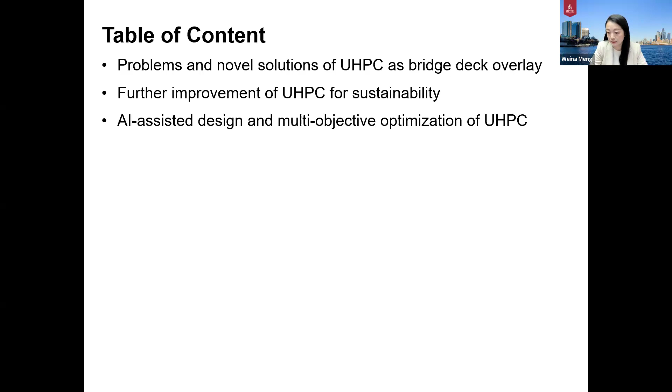So currently in the US, there's a high demand of bridge maintenance due to the spalling, delamination, and rebar corrosion of the bridges. Many of the bridge decks need to be repaired. So the most popular repairing materials for the bridge deck overlay include latex modified concrete (LMC), low slump dense concrete (LSDC), high performance concrete (HPC), and UHPC, ultra high performance concrete.

Compared with other types of repairing materials, UHPC enables much thinner thicknesses for the overlay construction, and also exhibits much higher mechanical properties. More importantly, UHPC has much better durability, which could allow extended service life, as you can see here. So UHPC is considered a very promising repairing material for bridge deck overlays.

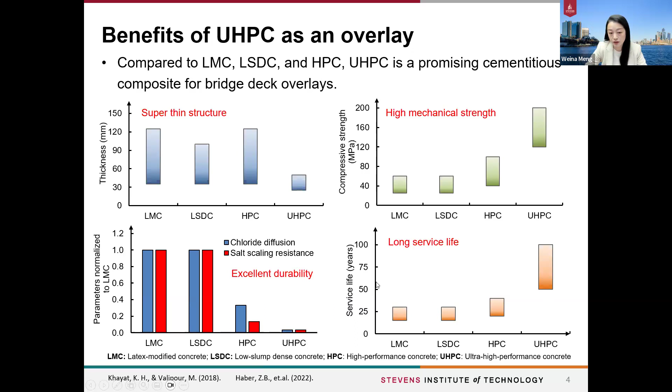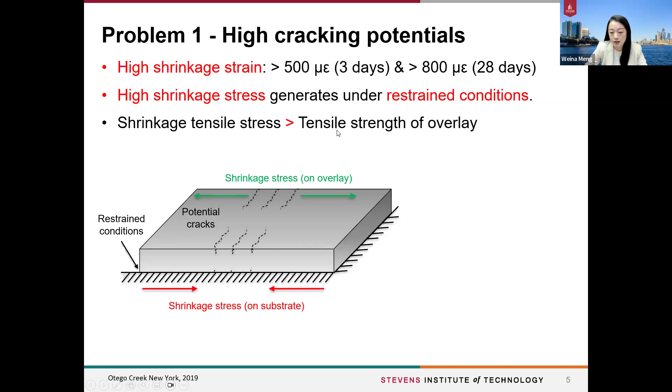However, there are several critical challenges of UHPC to be used as an overlay. First is it has high cracking potential, mainly because we use high binder content in UHPC, and that results in high shrinkage at early age. So the high shrinkage will introduce high tensile stress when it exceeds the tensile strength of the concrete, especially at early ages. It will crack the bridge deck overlay.

So the second big issue is the difficulties in slope casting. For the majority of bridge decks, it is a sloped structure with a slope somewhere between 2% to 5%. But the typical UHPC, as you can see, is very flowable, so it could flow from the top to the bottom, and it is hard to stay on the deck. So intensive labor and formwork usually will be needed for this kind of construction.

So the third problem we have here is the difficulties in large-scale production of UHPC. As you can see, usually during mixing, the mixer will be shut down if you mix a large volume of UHPC. But it's really not the case for using a normal mixer to mix conventional concrete.

The reason is, as you can see in this figure, it shows the mixing torque evolution for conventional concrete. The peak mixing torque is very low, much lower than the capacity of the mixer. So for mixing conventional concrete, there's really not a problem.

But for UHPC, if you mix the same volume as conventional concrete, the peak mixing torque will easily surpass the capacity of the mixer, causing the mixer to stop, which may damage the engine and waste all the raw materials. So those are the three critical challenges we identified.

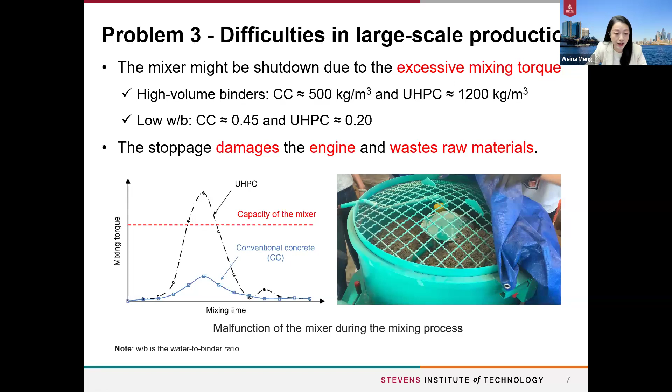To address the first issue, the high cracking potential, the most effective way is to reduce the shrinkage of UHPC by properly using internal curing agents, shrinkage reducing admixtures, or expansive agents. This shows a comparable shrinkage mitigation rate as summarized in this table.

However, using internal curing agents usually requires at least 24 to 48 hours to pre-saturate these materials, which is not very practical. For shrinkage reducing admixtures, even though they are very effective in reducing shrinkage, they are reported to have adverse effects on mechanical properties.

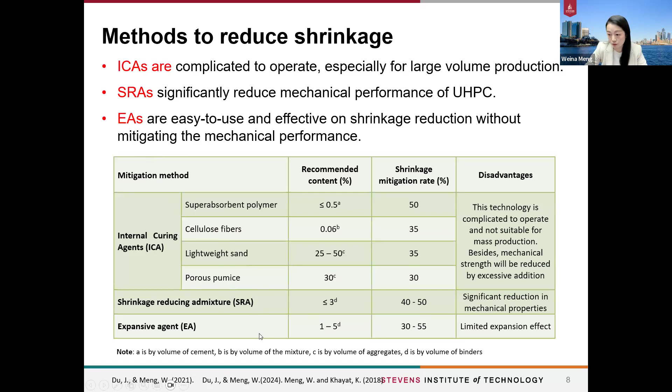Compared with the other two methods, using expansive agents is an easy method that can reduce shrinkage a lot without mitigating mechanical performance. So in our study, we tried to further improve the efficiency of the expansive agents to improve the expansion effect for reducing more shrinkage.

So we simply add the dry expansive agents into water for a couple of minutes, allowing sufficient water and space for it to grow more expansive products, enhancing the expansion effect.

So we use the ring test for evaluation, and we installed distributed fiber optic sensors on the ring specimens. This allows us to measure shrinkage stress development, and at the same time we also measure the tensile strength development of the concrete materials.

Using those two results to calculate the cracking potential over time. Usually if we can have the tensile strength development always surpass the shrinkage stress, then we will have concrete with very good cracking resistance.

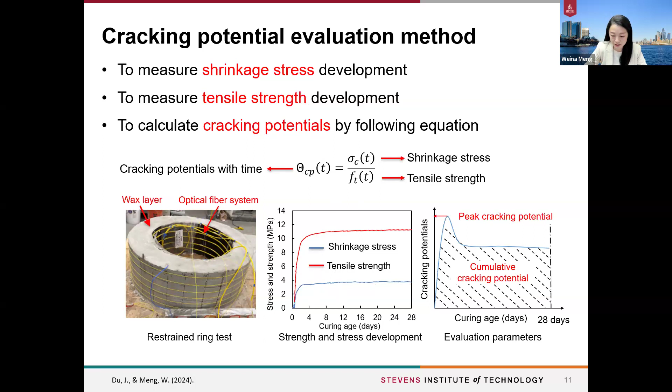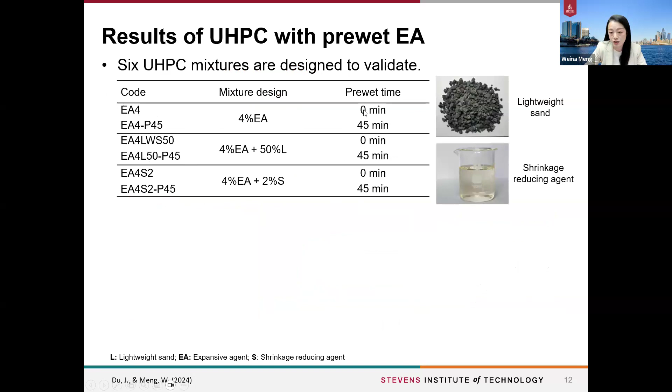So here we compare three groups of UHPC mixtures with different shrinkage reducing strategies. But for each of the strategies, we all use the expansive agent, and we compare the case with and without the pre-wetting method.

The result shows that with pre-wetting, we can significantly reduce the peak cracking potential as well as the cumulative cracking potential. That's for the best mixture with 4% expansive agent, 50% internal curing agents, lightweight sand, and 45 minutes of pre-wetting. With this mixture, until now we haven't seen any cracks.

So for the second problem, related to slope casting, the effective method is to enhance the thixotropic properties of UHPC, because thixotropy can enhance the shape stability of UHPC after casting.

As you can see, with high thixotropy, the UHPC can stay on the sloped panels, which can help us minimize the formwork and other construction-related costs. The typical way to enhance thixotropy is to use nano clay powders.

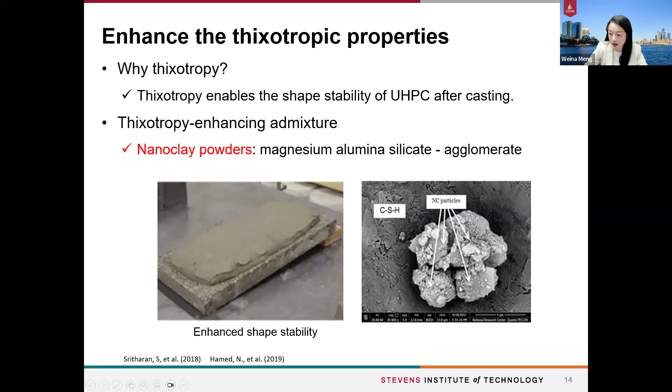However, this method, as reported, has very severe agglomeration of those nanoparticles. These agglomerations have very adverse effects on the mechanical properties as well as the durability of the materials. So to avoid such agglomeration, we use well-dispersed, water-based nanoclay suspensions to enhance the thixotropy.

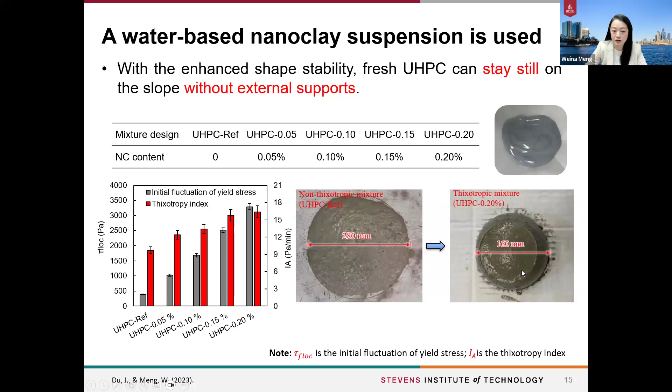As you can see, the thixotropic properties can be very effectively enhanced. With the enhanced shape stability, the fresh UHPC can stay on the slope without external supports. We also evaluate the interfacial properties of the UHPC and the substrate concrete.

We use the direct shear test to evaluate the bond strength at this interface, and we also quantify the interface voids by microstructural analysis.

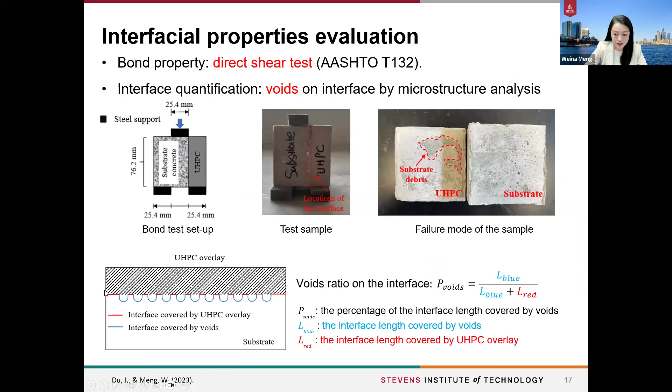The result shows that increasing the thixotropy by increasing the nanoclay content would reduce the bond strength. This is because more air voids were introduced at the interface.

So it is suggested that a little vibration should be applied to the thixotropic UHPC in order to reduce the air voids and improve the bond strength.

But for the vibration, we could optimize this process. We can use the minimum vibration time to achieve acceptable bond strength, as there's a development of bond strength with increasing vibration time, and it stabilized after a while for different mixtures.

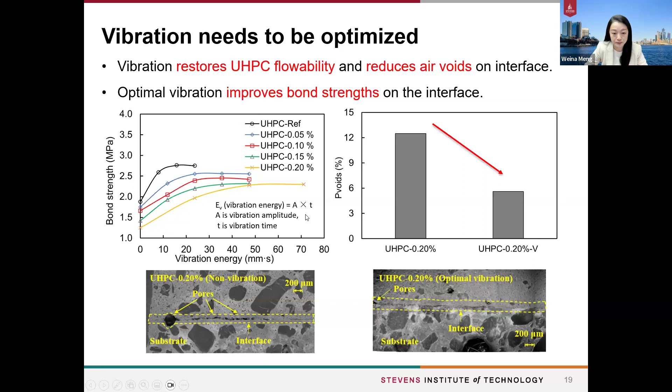For the third problem, to facilitate large-scale production of UHPC, we should first understand the mixing torque evolution during the mixing process. The most difficult time is when materials transform from solid to liquid. After that, torque reduces to very small values, representing the homogeneous time. By understanding the key impact factors on mixing kinetics, we could optimize mixing procedures for UHPC production at large scale.

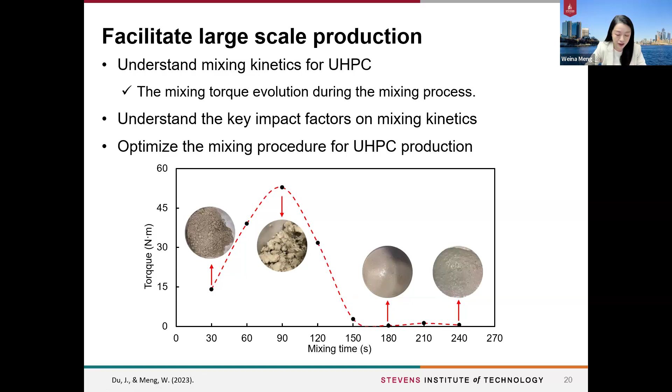In our studies, we investigated three key parameters: mixing temperature, mixing volume, and mixing methods.

Specifically for mixing methods, we have a mono-batching method. This means we add all raw materials at the same time, then add water and chemical admixtures, and homogenize it at once.

For the multi-batching method, we equally divide the raw materials into 2 to 3 portions. We add one portion and homogenize it, then add the other portions until all materials are added and homogenized.

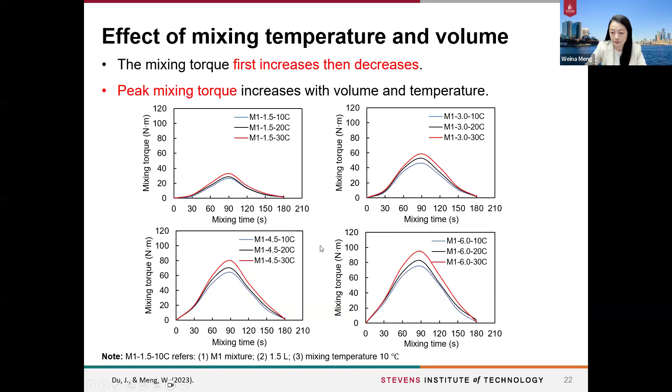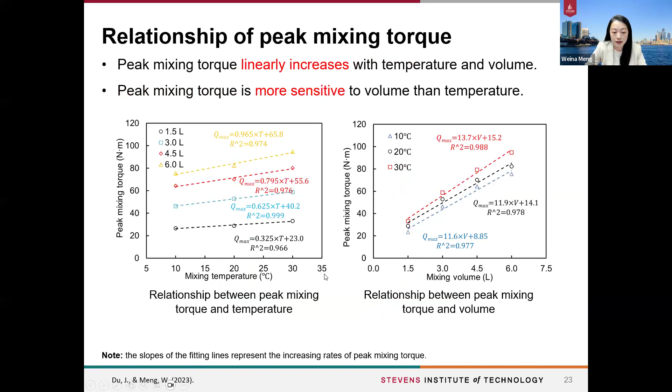From our results, we find that both temperature and volume increases significantly increase the mixing torque. The peak mixing torque is more sensitive to volume than temperature, as shown in this analysis. Multi-batching can effectively reduce the peak mixing torque.

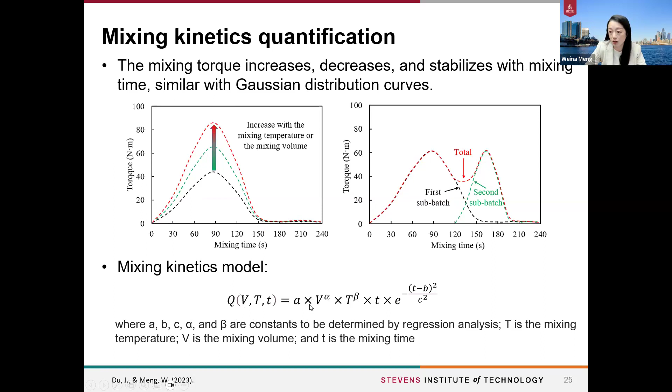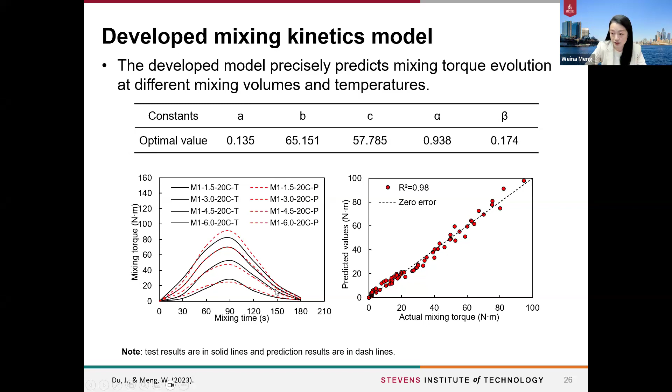By regression, we can determine the constants for the model and use it to predict mixing kinetics curves. We developed this model because we want to use it to optimize the mixing process for any large volume of UHPC.

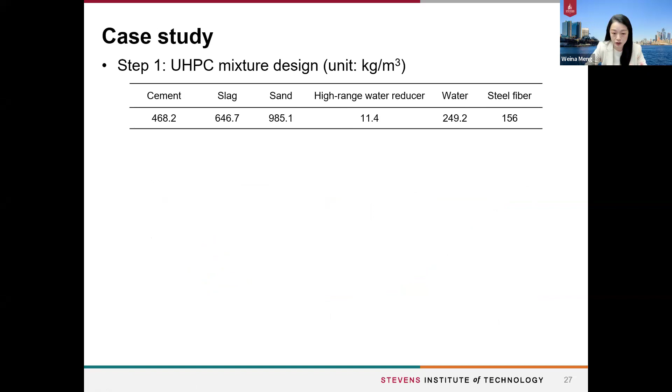Here's a case study. If you have a certain UHPC mixture design, the first thing you should do is determine the model constants by conducting some small batches of UHPC.

Once you determine the constants, given the volume you target for mixing and the mixing temperature for construction, you can determine the mixing torque for mono-batching, 2-batching, or 3-batching.

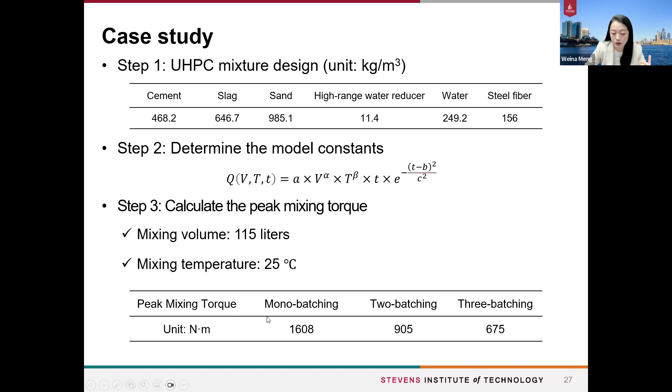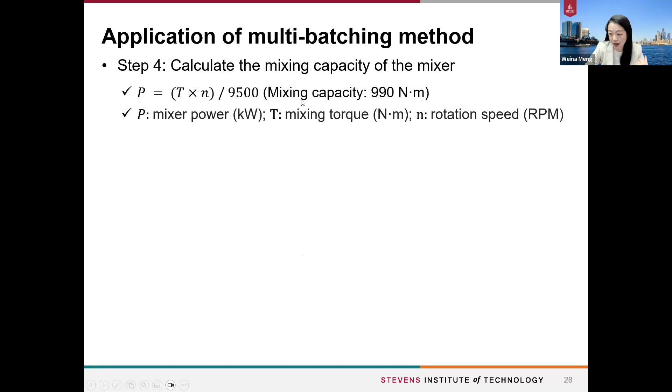After that, given the mixer you have—whether a normal mixer, pan mixer, or high shear mixer—you can calculate the mixing capacity of that mixer. Once you know that, you can compare the different mixing torque evolution curves with the mixing capacity. In our case, a single mono-batch definitely will not work.

What you can do instead is a 2-batch approach, which will be sufficient for successful large volume production if you use a normal mixer. This is the 2-batching method, and as you can see, it mixes very smoothly. So we addressed this problem.

In brief summary, our contribution to UHPC overlay is addressing critical issues. We developed UHPC with low cracking potential, developed methods for enhancing shape stability of UHPC for sloped casting, and developed the fundamentals for optimizing the mixing process for large-scale UHPC production.

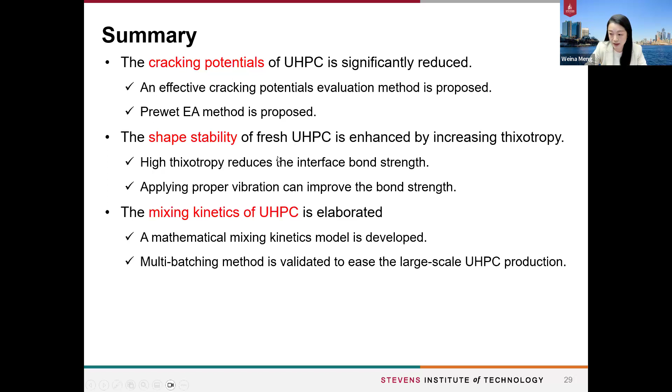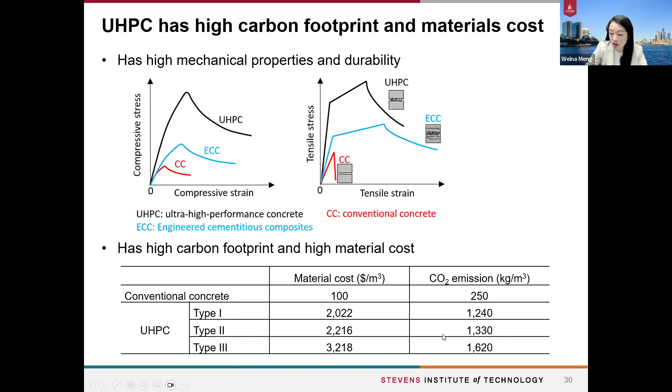Currently, we propose many strategies to decarbonize UHPC, including integrating low carbon ingredients, advancing processing methods, and developing new construction techniques.

In the interest of time today, I will focus on the utilization of solid wastes and our work on intelligent design for sustainable UHPC.

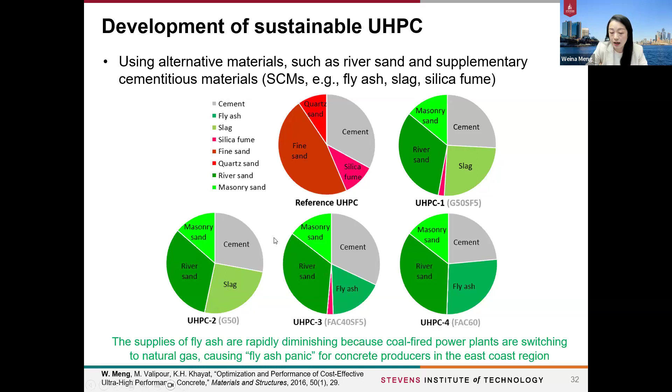The major work on developing sustainable UHPC materials is to replace cement with high volumes of supplementary cementitious materials such as slag and fly ash. However, those typical supplementary cementitious materials are in high demand, and it's reported that supplies of some SCMs are diminishing. There's really a need to find alternatives.

In this work, we try to find alternatives, specifically high carbon and porous types of wastes, to replace cement and develop low carbon, cost-effective UHPC. The high carbon waste materials I will introduce today are off-specification fly ash (OSFA) and biochar.

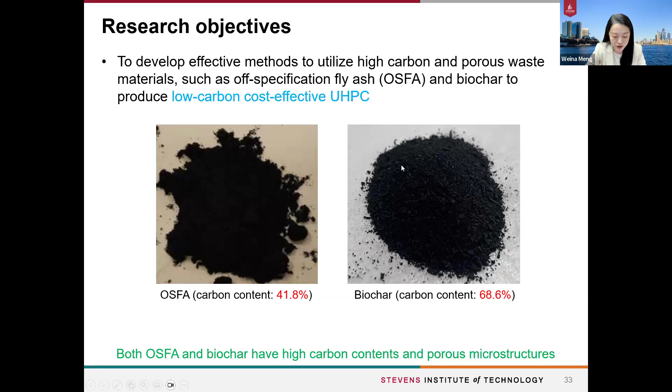So we consider those two materials due to their high potential and large availability. Again, the off-specification fly ash, as you can see, has a very large amount. Just 2 to 3 years ago, it was still a very large amount, and it's really targeted for landfill.

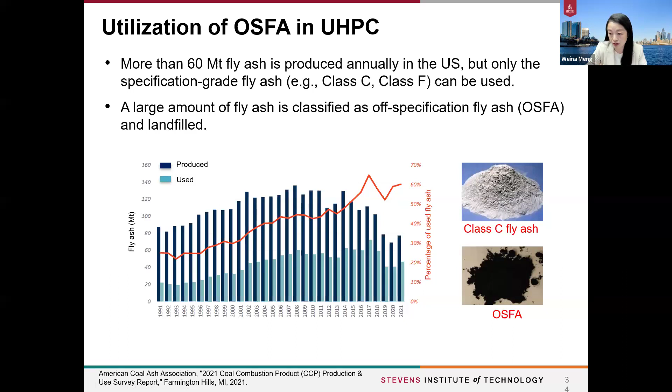Different from normal fly ash, the OSFA has very low reactivity because, compared with normal fly ash, it has negligible reactive oxides in the system. The majority content is carbon, and that reduces the mechanical properties as well as the durability of concrete. Also, the OSFA has very low density, and due to its high surface area, it absorbs some chemical admixtures and ions. Specifically, it's reported that it absorbs the air entraining admixtures, which could reduce the freeze and thaw durability.

So there's a lot of problems with the OSFA. In our studies, we investigated three groups of UHPC with different binder systems. The first is a control with 100% cement. The second is a binary system with OSFA at different content and cement. The third group has a fixed 20% OSFA with different content of slag and cement.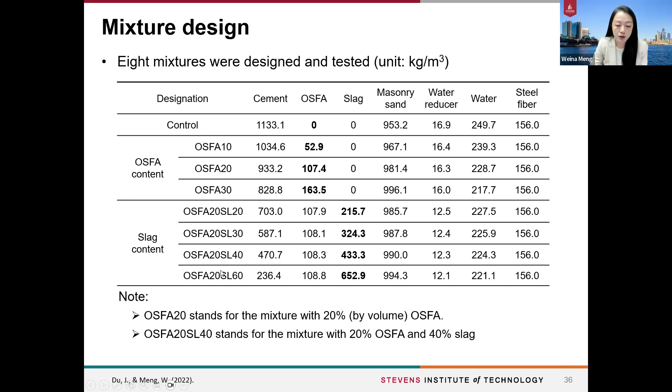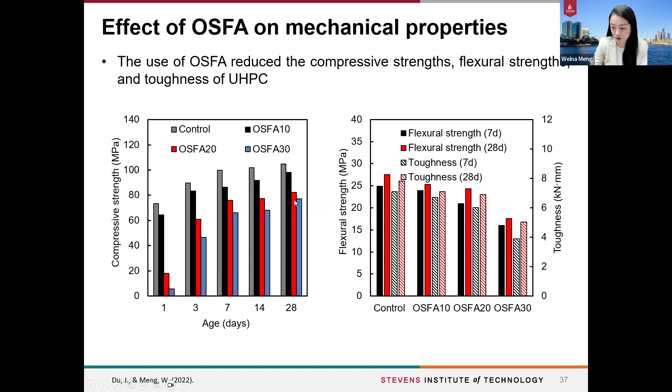As expected, if we use OSFA to replace cement, both the compressive strength and the flexural properties significantly reduced. The reason is that OSFA retards and hinders cement hydration due to two effects. First is the dilution effect: OSFA is inert and much less active than the cement, so there is much less cement hydration. Second is the adsorption effect: as OSFA has very high surface area and high carbon, it absorbs the calcium ions dissolved from the cement, which hinders the precipitation of hydration products.

But the good thing is that if we incorporate slag into the system, especially 40% slag in the binder system, we can increase the 28-day compressive strength by 50%, and increase the 28-day flexural strength and toughness by 20% and 10% respectively.

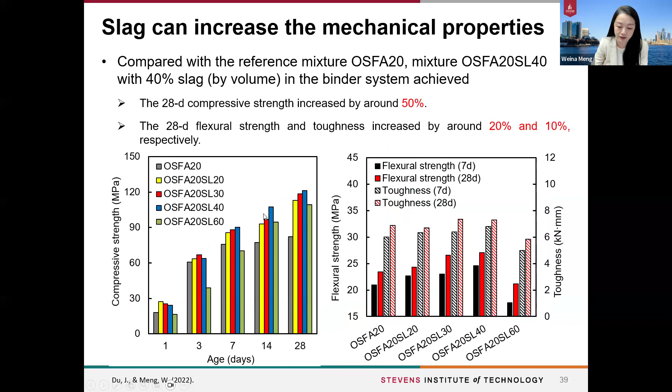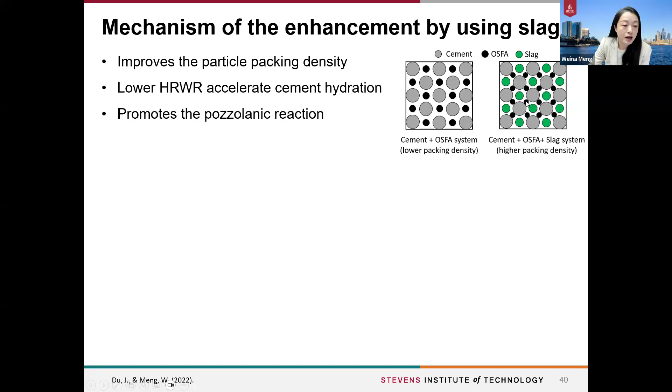The enhancing mechanism is that, first, the slag has a different size than the OSFA and cement, so it can enhance the particle packing density of the microstructure, which refines the microstructure. Also, due to improved particle packing density, we can release more free water and reduce the use of high range water reducer, which is basically a long chain polymer, so we can expose more cement to water for cement hydration.

Also, by using slag, since slag is a pozzolanic material, it promotes the pozzolanic reaction and forms more dense and strong hydration products. Both the OSFA and the slag show benefits in reducing autogenous shrinkage. Basically, both could release or increase the free water in the system and in the capillary pores, so that we can mitigate self-desiccation induced shrinkage significantly.

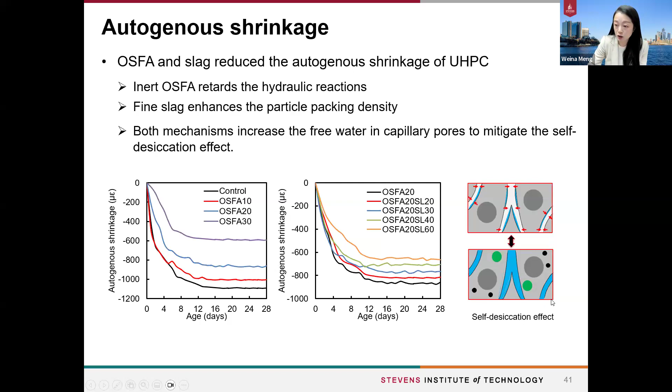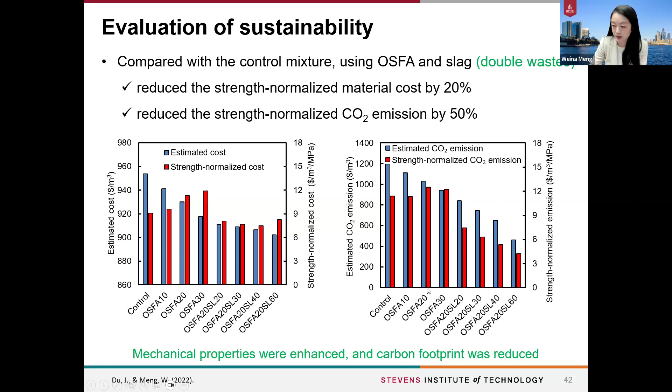In terms of sustainability, as we use two types of waste materials in the system, we could reduce the strength normalized materials cost by 20% and reduce the strength normalized CO2 emission by 50%. As you can see here, the maximum OSFA we can use in this specific study is 20% without mitigating the strengths.

To further improve the utilization rate of such waste materials, we're thinking to strengthen these porous structures with nano calcium carbonate. To create this calcium carbonate, we use a CO2 sequestration technology where we directly inject CO2 into a calcium hydroxide rich solution. This solution was prepared with the OSFA, so we can coat the surface of the OSFA with nano calcium carbonate. With that, we could significantly increase the utilization rate.

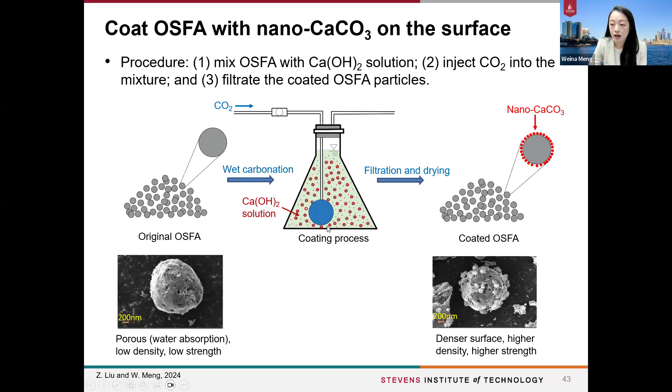The second high carbon type of waste we considered is biochar. Biochar is produced through the pyrolysis process from biomass. It has very similar features to the OSFA: very low density, very high carbon content, and very high surface area. Because of the high carbon and high surface area, it is usually used as a soil treatment material or to remove heavy metals from wastewater.

We looked into the microstructure of the biochar and found it's highly porous, so we're thinking to utilize this type of waste as an internal curing agent. What we did is pre-saturate the biochar in water for 24 hours to make it saturated surface dry. With this water, it works as a reservoir and absorbs water inside. When put into the cementitious system, it will hold the water during mixing and release it during the hardening process. Compared with external curing strategies, especially for very dense types of concrete, it can provide much more effective curing for the concrete.

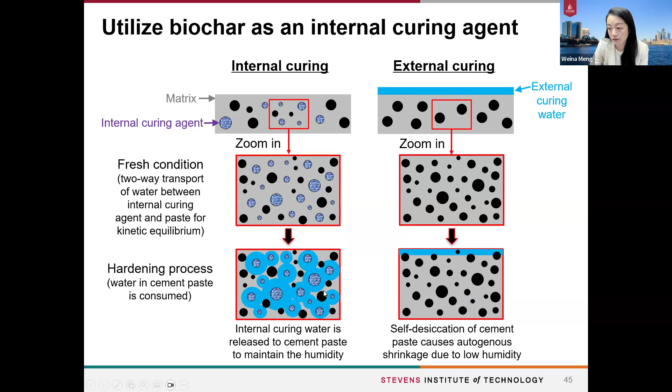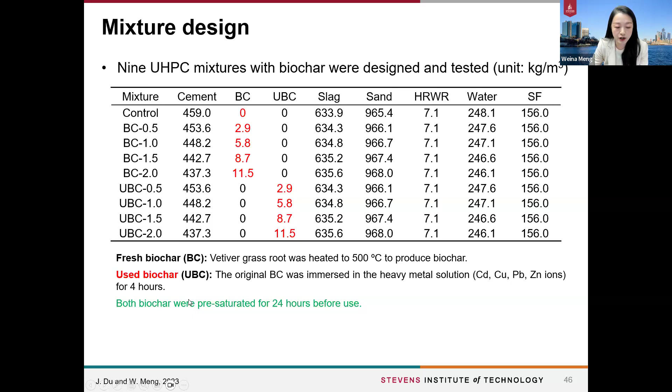So we investigate two cases of biochar. The first is a fresh biochar, and the second is we use the fresh biochar and immerse them into heavy metal solutions for 4 hours. We call this type of biochar the used biochar. For both types, we pre-saturated them for 24 hours before use.

Both biochars improved workability. The reason is that the biochar has smaller sizes compared to the cement and slag, and they improve the particle packing density and release more free water for lubricating the particles.

One thing I want to note is that in most studies utilizing biochar in concrete, they saw a significant drop in mechanical strength when directly using the biochar. But in our case, using it as an internal curing agent with 1% as the optimum dosage, compared with the control, we saw the 28-day compressive strength, flexural strength, and toughness increase by 10%, 20%, and 25% respectively.

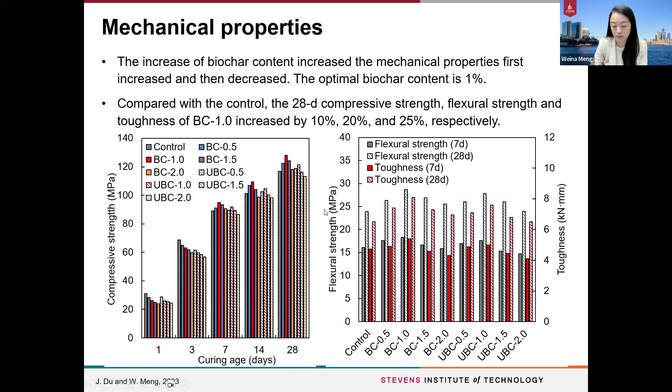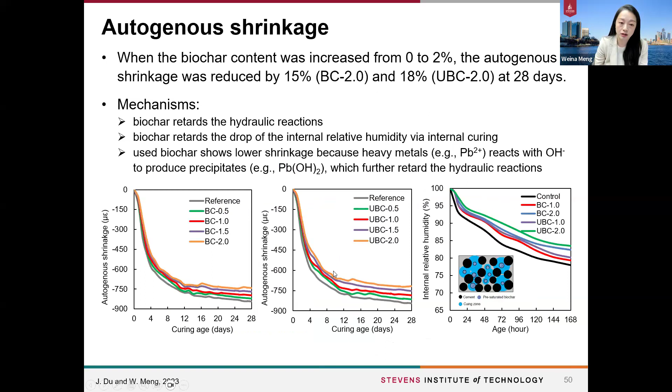Again, not surprisingly, since we use the biochar as an internal curing agent, we can more effectively cure the UHPC, so the autogenous shrinkage is significantly reduced.

Even though we didn't use a large amount of biochar, just 2%, we can achieve a very high reduction in CO2 emissions, as the biochar itself is a carbon-negative material. Also, from the leaching test, we observed that the UHPC can permanently lock the heavy metals inside of it, especially for the used biochar cases. This demonstrates the environmental benefits of this study.

In brief summary, the utilization of waste materials in UHPC for sustainability should be treated case by case, with different strategies applied for different waste materials. For OSFA, we should use slag to further improve the reactivity of the system and other properties. For biochar, as it has a very high amount of pores, we could utilize it as an internal curing agent to improve the overall performance of UHPC.

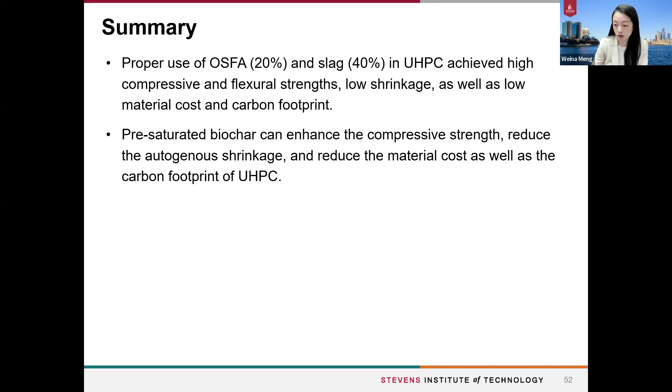Besides biochar and OSFA, there are actually hundreds of different types of waste materials being considered to develop sustainable UHPC.

There are really two major ways to design or optimize UHPC. The first is particle packing model-based methods, which people usually use for high packing density. This method can help the system achieve very high particle packing densities, but it does not guarantee key performance properties such as tensile properties, shrinkage, or durability.

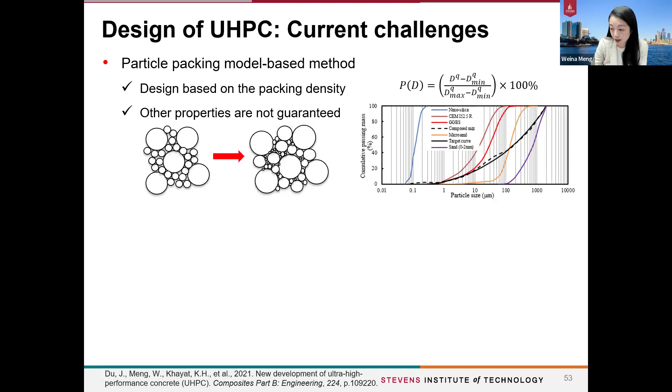Because of that, the majority of research uses performance-based methods. For these methods, people want to achieve target performance, so they have to do step-by-step testing, optimizing the binder system, then the mortar system, and then the concrete or fiber-reinforced concrete system. This method involves extensive experimental testing, and it's costly, time-consuming, and labor-intensive. So there's really a need for more efficient and effective methods to design UHPC.

Because of that, we currently developed an AI-assisted design framework for auto discovery of low-carbon, cost-effective UHPC. For this framework, first we should collect a large enough dataset or source of knowledge and feed the data to develop a machine learning model for prediction. In this case, the input is the concrete design variables and the output is the concrete properties.

Once we get a very accurate prediction model, we embed optimization and decision-making algorithms for intelligent optimization. In this case, the input is the target properties and the output is the optimal design.

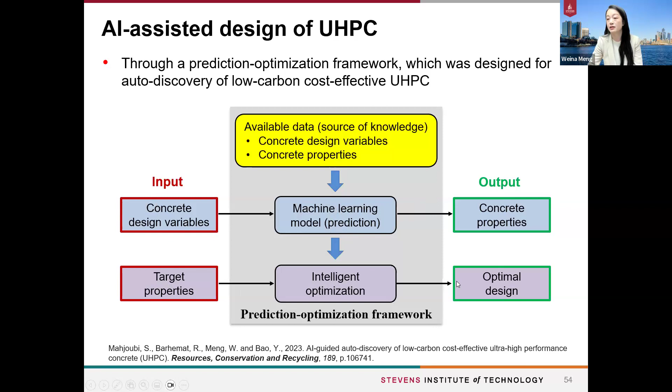So the data we need are two sets. One is concrete design variables, including the types of ingredients, mixture variables, and processing schemes. The second set is UHPC properties, the fresh properties and hardened properties, like mini slump flow, flow time, flexural properties, Young's modulus, shrinkage, and so on.

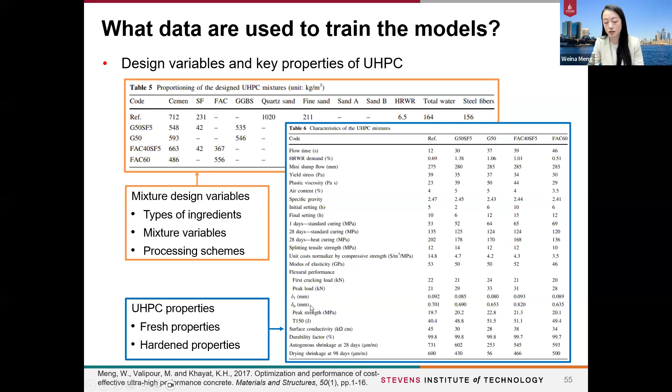In our research, we tried to collect a large amount of useful data more efficiently, so we developed the AI data collector, data generator, and data processor, to automatically determine the most appropriate machine learning model, as there are many, many machine learning models.

We also developed the AI auto learner to optimize the UHPC by considering many objectives, as our target is to design a sustainable UHPC that is low cost and also has high mechanical strength and durability. So it's a multi-objective kind of optimization. For that, we developed the AI optimizer.

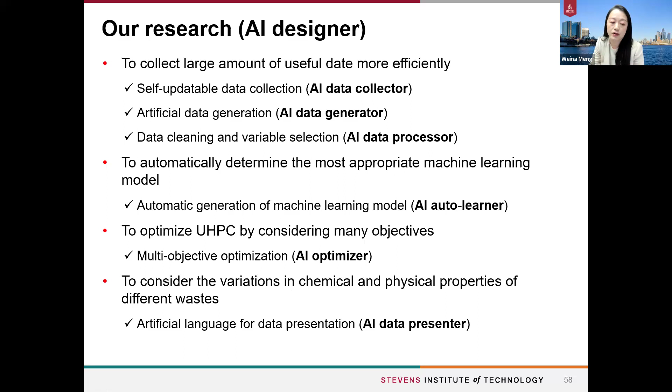And last but not least, to consider the variations in chemical and physical properties of different wastes, we developed the AI data presenter.

For the AI data collector, we developed it to automatically collect the available data from published documents. We collect data from journal papers, conference proceedings, reports, etc. This collected data can be automatically updated through tracing and extracting data from new publications, so we can always get the newest and largest amount of data for the machine learning models.

By using the AI collector, if we collect 1,000 data points, we just need 1 hour. Before that, manual collection of 1,000 data points would need around 1 month. So we significantly reduce the time with high efficiency and high accuracy.

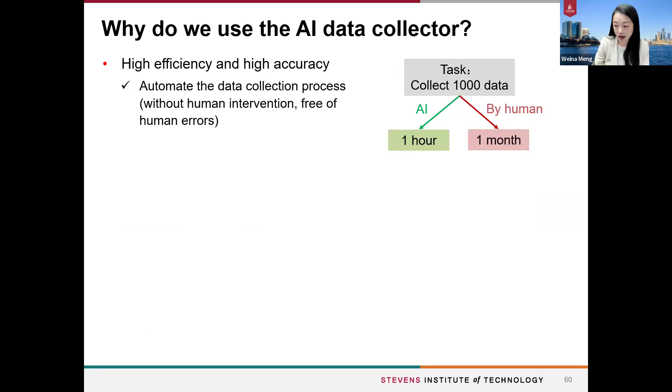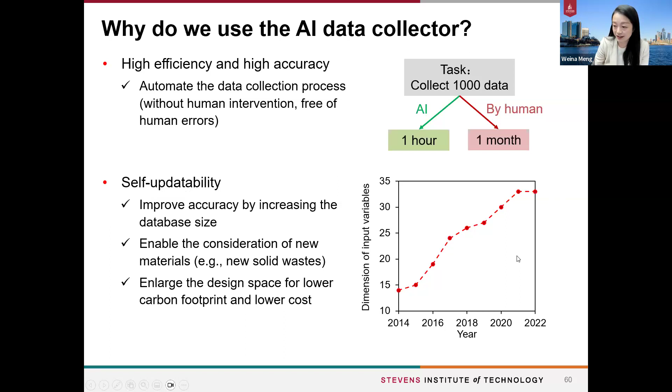The AI data collector also has a function of self-updatability, which will improve the accuracy by increasing the data sizes. It also enables the consideration of new materials, because more new solid wastes are considered in new publications, so we can involve all that data in our machine learning models.

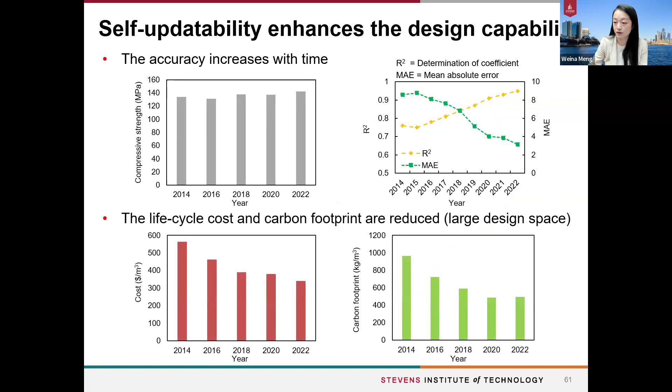The self-updatability will enhance the accuracy of the machine learning model over time, and reduce the life cycle cost and carbon footprint over time, because we consider more and more new types of waste materials for sustainable UHPC.

For some cases, we can collect sufficiently large data, but for other cases, especially if we consider new materials, the published results may not be sufficient. In that case, we will need to generate artificial data to enrich our data set for higher accuracy of models.

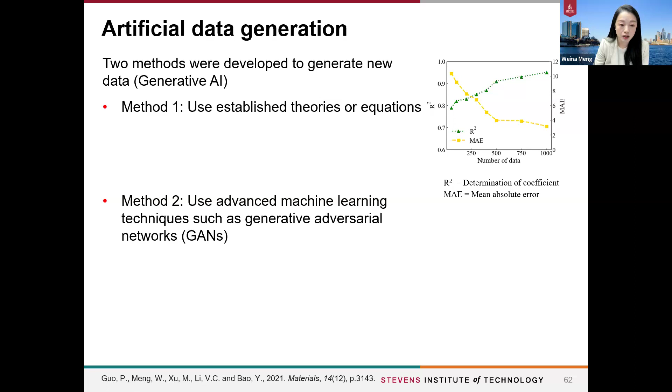We proposed two methods to generate artificial data. One is to use established theories or equations. For example, there's a well-established relationship between tensile strain and steel fiber characteristics. Given different values of the fiber information, we can get a series of strain values. This is one way to establish new data.

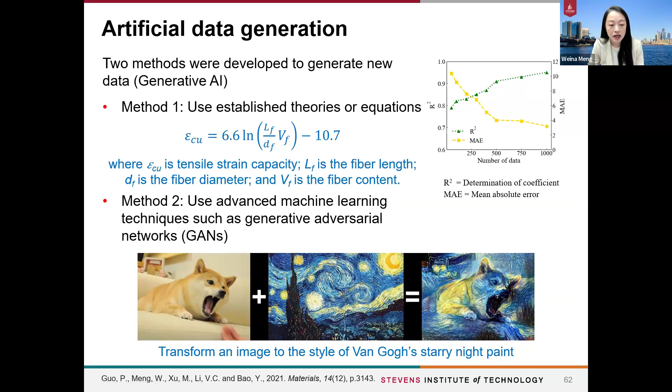The other method is to use advanced machine learning techniques such as generative adversarial networks, GANs. The concept is the same as transforming an image into the style of Van Gogh's Starry Night. The GAN model learns from existing real data and generates artificial but reasonable and useful AI data.

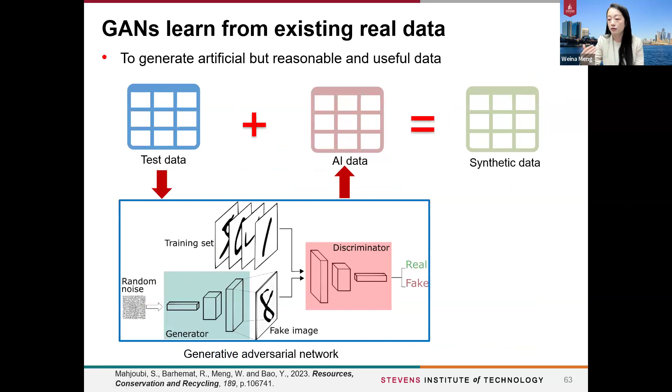We combine the AI-generated data with the real data as synthetic data, so that we use the enriched data set for machine learning model training.

Now we know how to get a high quantity of data. The next question is: how can we get high quality data? For that purpose, we have to identify and properly remove the anomalous data from our data set. The good thing is that anomalous data usually have very different features from normal data.

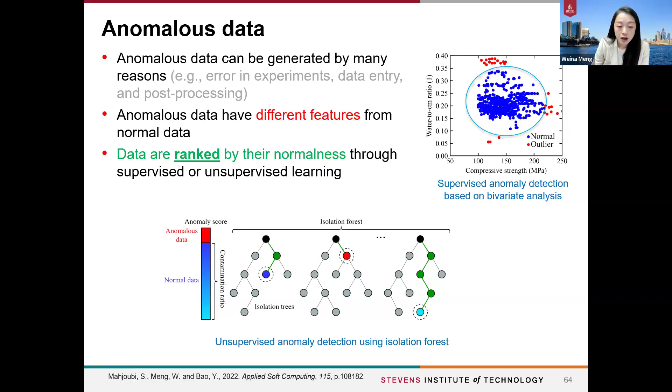Through using supervised and unsupervised learning, we can rank the data by their anomaly level. However, this ranking is based on data-driven methods, not on material science, so it could treat some normal data as anomalous data.

For that, we proposed a contamination ratio, defined as the percentage of anomalous data in a data set. Through parametric studies, we found that removing all the anomalous data doesn't give the highest accuracy; instead, there's an optimal contamination ratio that gives the highest accuracy or minimum error.

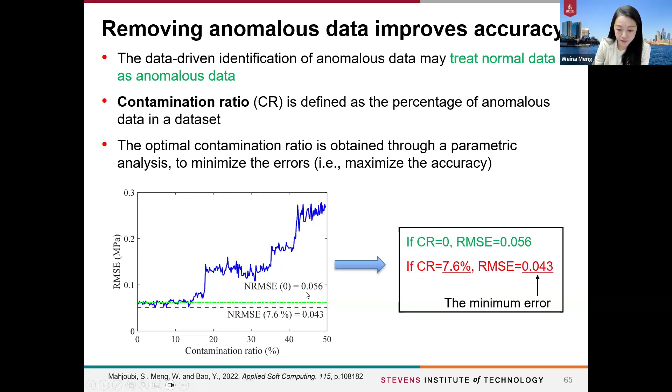Also, the variables we select should be optimized to achieve higher accuracy of the machine learning models. If we consider extra variables, the model becomes very complicated and inaccurate. If we exclude necessary variables, that's also not good, because the model will be inaccurate too.

The criteria for variable selection are: first, the variables should be independent of each other. For example, we cannot include both water content and water-to-cement ratio at the same time, because they are dependent. Also, the design variables should be highly correlated to the concrete properties.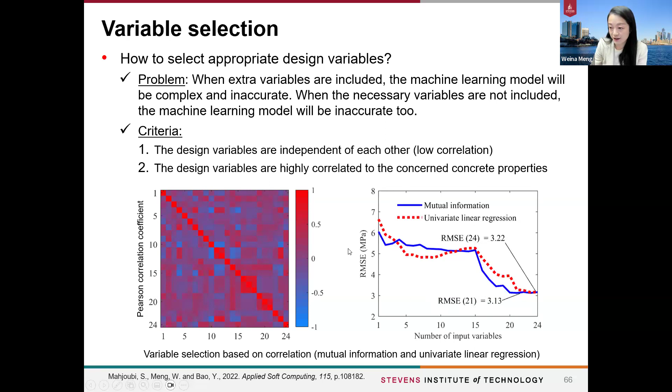In terms of machine learning model determination and selection, for now there are many machine learning models, including individual models and ensemble models.

Overall, the ensemble models perform better than the individual models, but the different models have different performance. It really depends on the specific problems and the features of data you adopted.

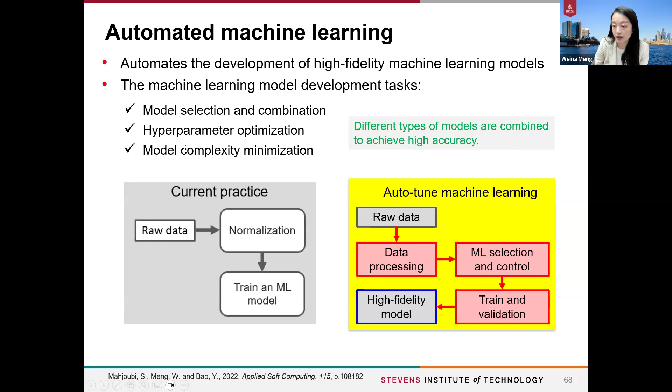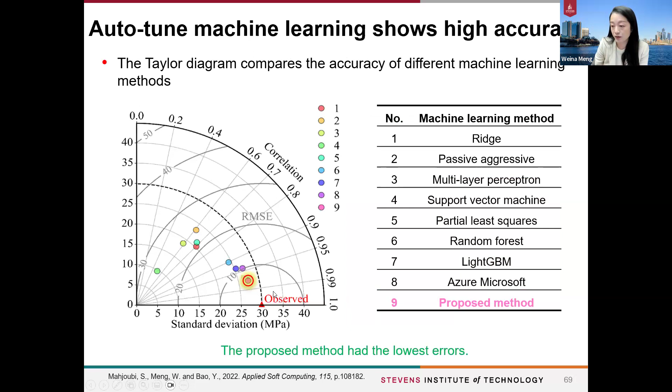Now that we have high accuracy machine learning prediction models, we can move to intelligent optimization. The optimization of sustainable cost-effective UHPC is actually a multi-objective optimization, where we should simultaneously optimize the environmental, economical, mechanical, and durability properties at the same time.

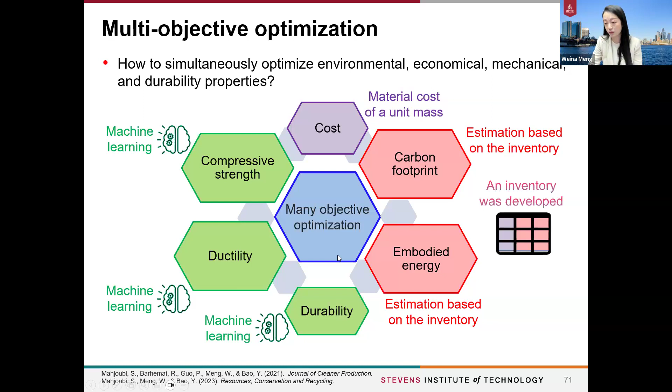The method here is that we first collect the data we need, mainly the concrete design variables and concrete properties, and use that data to develop high accuracy machine learning prediction models. At the same time, we collect inventory data and use it to calculate the environmental and economical properties, such as carbon footprint, energy consumption, and costs based on raw materials.

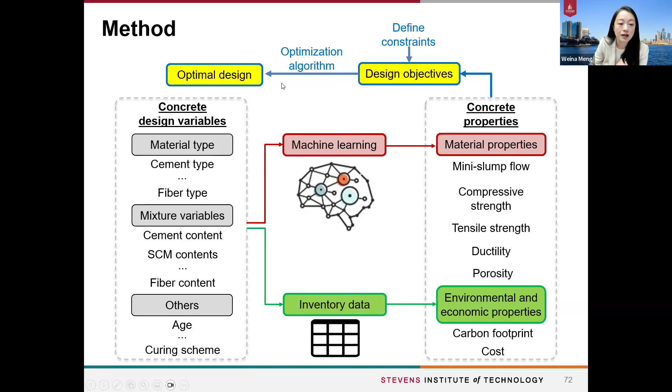Once we have this collected, we define the constraints and objectives and embed optimization algorithms and decision-making algorithms in order to output an optimal design. Evolutionary optimization algorithms are used to search for the optimal solutions by minimizing the objective function defined based on the design objective.

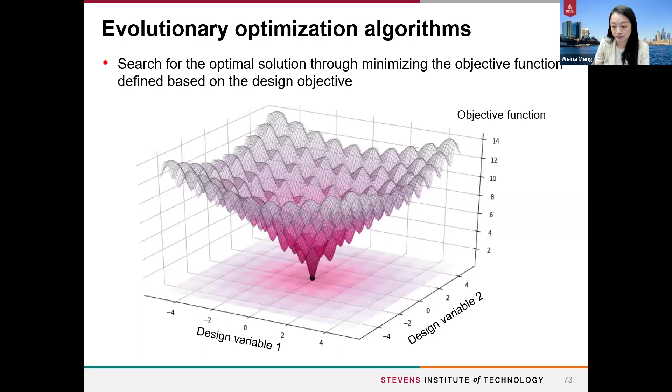Here shows an example of how we use the AI design method to design a green UHPC, considering many types of different waste materials. The design constraint we set is that the mini-slump flow should be no less than 260 millimeters, and we set the 28-day compressive strength no less than 120 megapascal. For the design objectives, we should minimize the unit cost for cost effectiveness, minimize the unit carbon footprint, and maximize the compressive strength.

Our results show that we reduced the cost by 65% and reduced the carbon footprint by 56%.

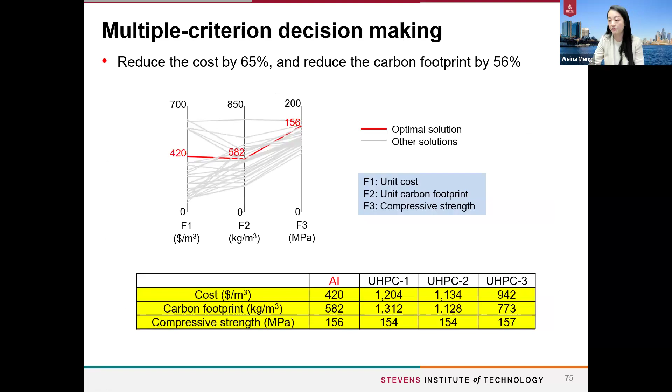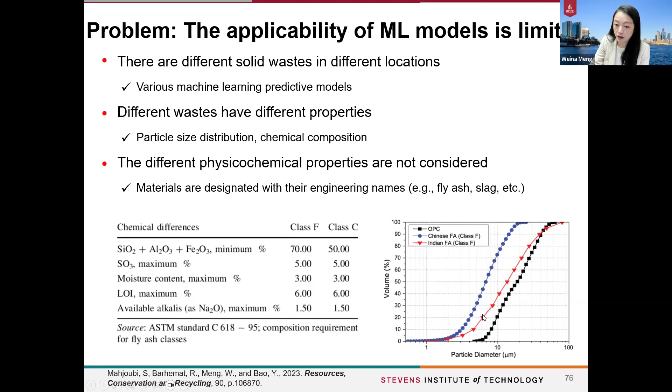Currently, we develop methods and create an artificial language to describe these waste materials in terms of chemical and physical properties. What we did is first define some symbols to describe different chemical or physical variables, and then assemble those symbols into sentences and assemble the sentences into essays.

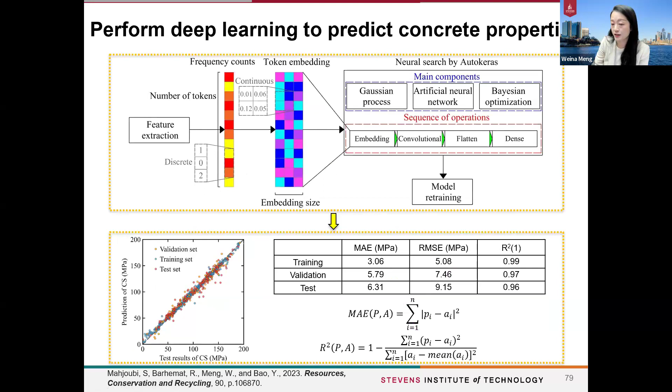Through this artificial language and text mining, we transform the essay into numerical data and use that data to perform deep learning to predict concrete properties. Most importantly, we can use these methods to unlock or investigate some unknown chemical reactions, because we can evaluate the interactions between pairs of different chemical variables.

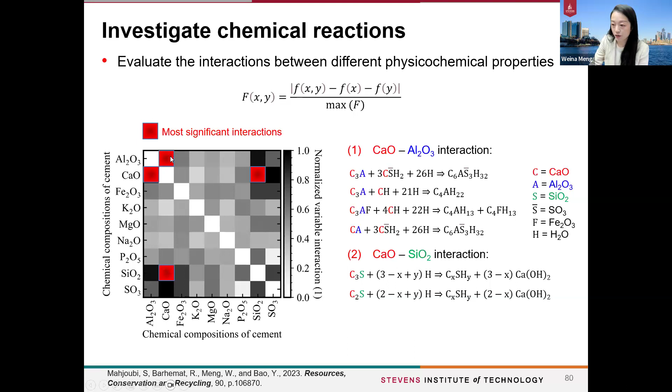In summary, for this work, we can use the AI-based design methods, or the prediction optimization framework, to design sustainable UHPC. It is also possible to use the AI method to investigate unknown chemical or physical reactions of new concrete systems.

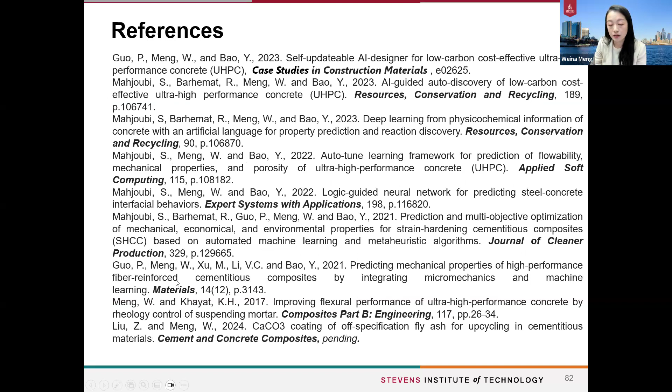In the interest of time, I didn't elaborate on some of the information, but everything I presented today was published. Some of the publications are shown here, including those related to UHPC materials development.